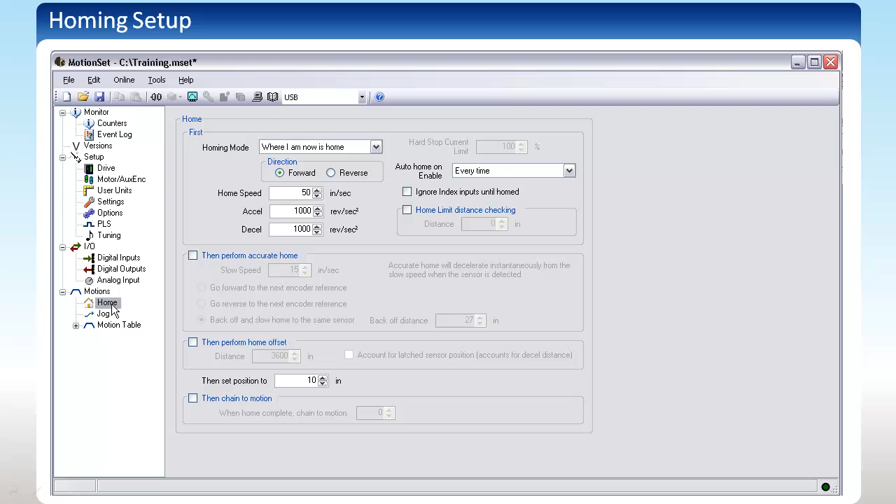Let's start with homing. Your first decision is to select the homing mode that fits your application. Options include homing to a dedicated home sensor, home to an overtravel sensor, home to the marker pulse or encoder reference, or set home as wherever the axis is at the moment.

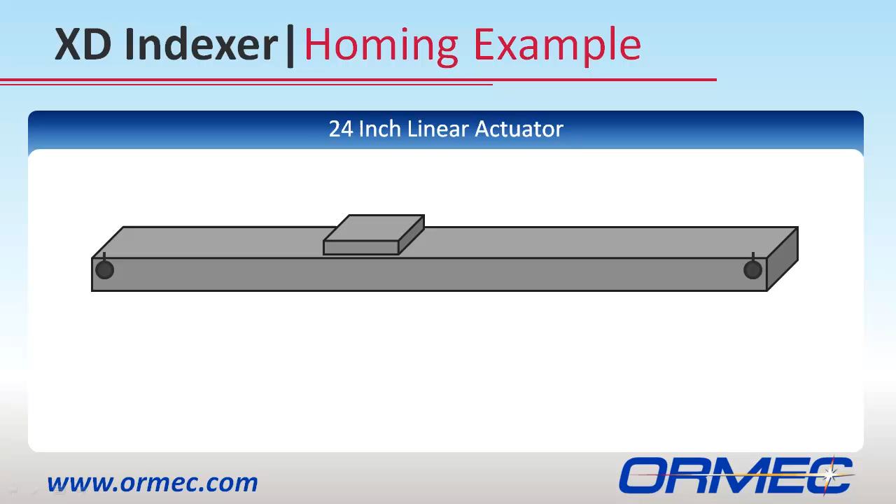To better understand how to program a homing routine, let's make up a hypothetical situation. Let's say that the indexer controls a 24-inch linear actuator that has end-of-travel sensors at both ends of the actuator, but no home switch. For application-specific reasons, after homing, the axis needs to be centered on the actuator, and the center location needs to be reassigned as 0 position so that the axis can be commanded positive 12 inches in the forward direction and negative 12 inches in the reverse direction.

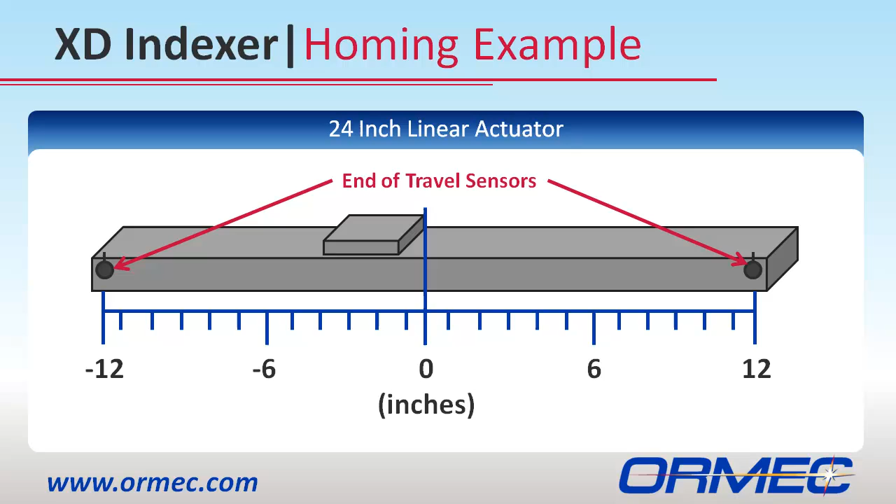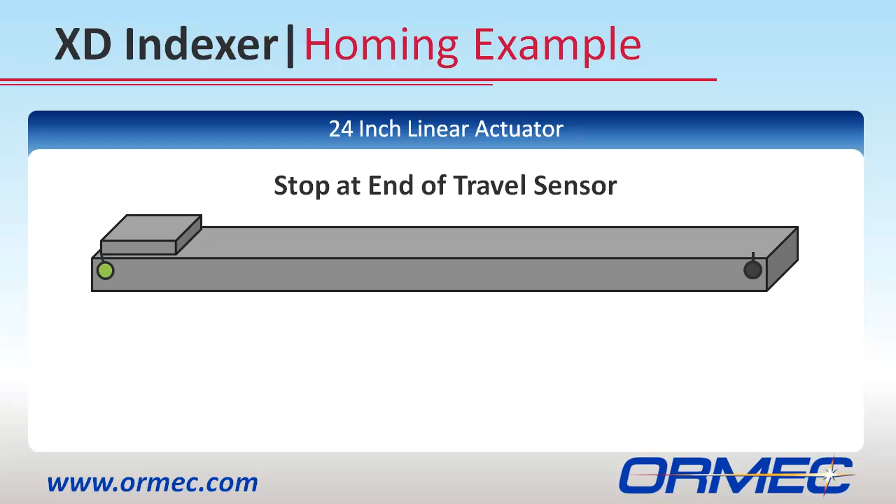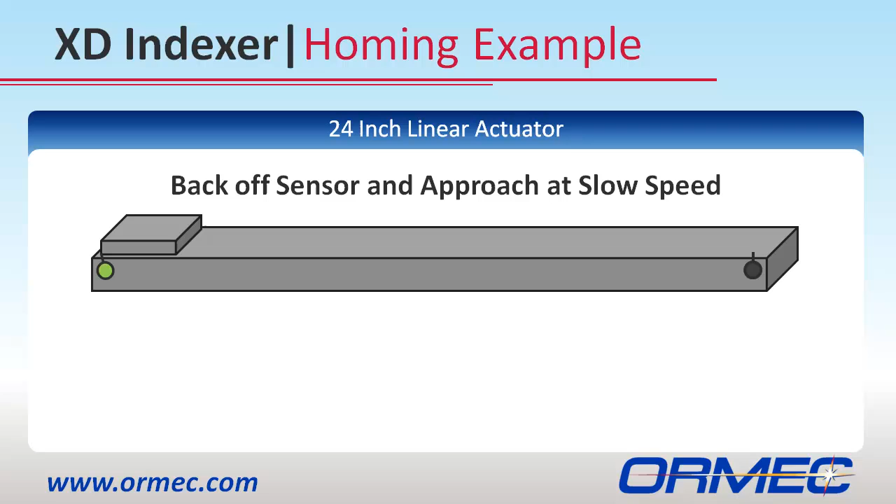The home routine breaks down like this. First, the axis should move in the reverse direction at a controlled speed. When the end-of-travel sensor is reached, the axis comes to a stop. Then, the axis moves in reverse 1 inch to get off the sensor and approaches the end-of-travel sensor again at a very low speed to see the edge of the sensor very accurately. Once the rising edge of the end-of-travel sensor is determined, the axis moves 12 inches forward to the center of travel and sets that position to 0 inches.

Now let's take a look at how to program that. First, select Home to Negative Limit for the homing mode. Select the reverse direction so the axis searches for home in the correct direction. Set the control speed, accel and decel. Enable the next section by checking the box that says, Then perform accurate home. Select a slow speed for the accurate home move and select back off and slow home to the same sensor. Set the back off distance to 1 inch.

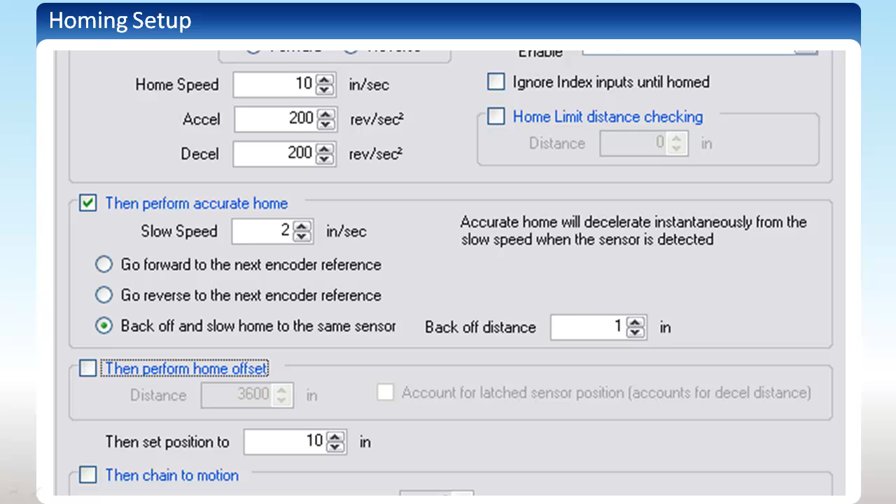So far, we have told the axis to home in the reverse direction to the negative end-of-travel sensor. When reached, it will back off 1 inch and slowly move towards the sensor again. Now we want to enable the next section by checking Then perform home offset and type -12. This means that after the accurate home is complete, the axis will back off 12 inches to get to the start position in the center of the actuator.

This offset also has the added option of accounting for the latched position of the home sensor from the previous step, regardless of whether that was the initial home or accurate home. When an axis homes, it moves at a constant velocity until it sees a home sensor, then decelerates to stop. This stop position is past the rising edge of the sensor and therefore is only so accurate. This checkbox allows you to electronically compensate for this small distance by keeping track of the exact position of the rising edge of the home sensor.

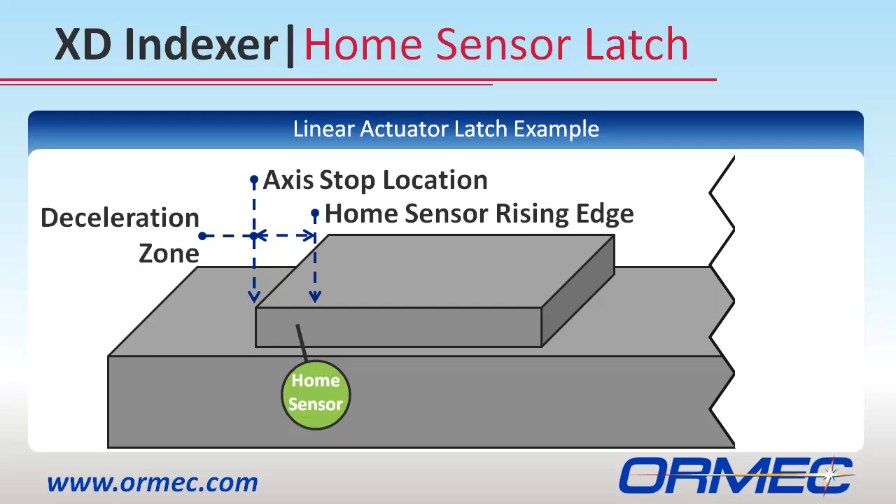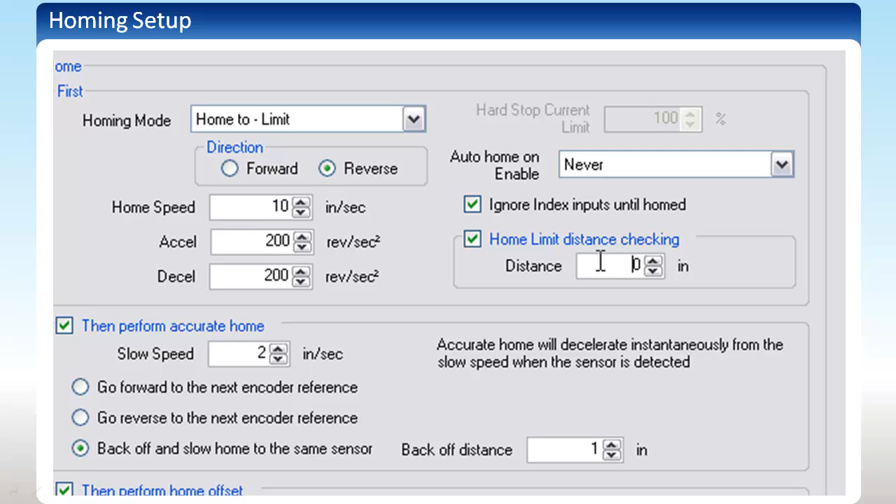After the axis does the offset move to the center of travel, the Then Set Position To allows you to assign a position for this location. In our example, this position is reassigned as 0 inches. There are a few other options here that may come up in your application. Back at the top, you can set the indexer to home automatically when the axis is enabled. You can also set the indexer to ignore index inputs on the drive until the axis is homed. A home limit distance can be specified so that if the axis moves a predetermined distance without finding the home sensor, it faults the axis.

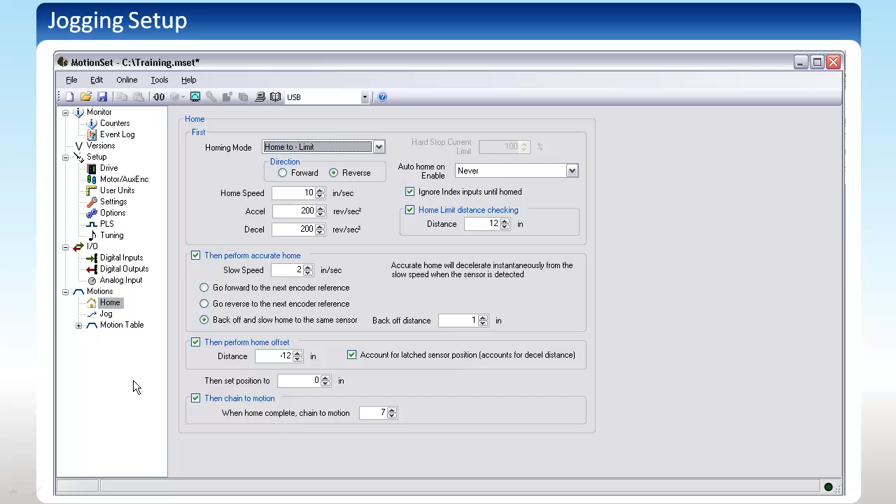Finally, at the bottom of the screen, you can enable a chain to link the end of the home routine to another motion automatically. That means after completing the above home routine, it will jump into the motion table and begin executing motions. Finally, the jog branch allows you to set up a normal and fast jog speed as well as the accel and decel to use when jogging.

If we look back at the input assignment, we can see how to use the normal and fast jog speeds. In this input assignment, input 7 or 8 will jog the axis forward or reverse. I can add jog fast to input 9, which means that when input 9 is on, I can trigger input 7 or 8, and I will jog fast forward or jog fast reverse.

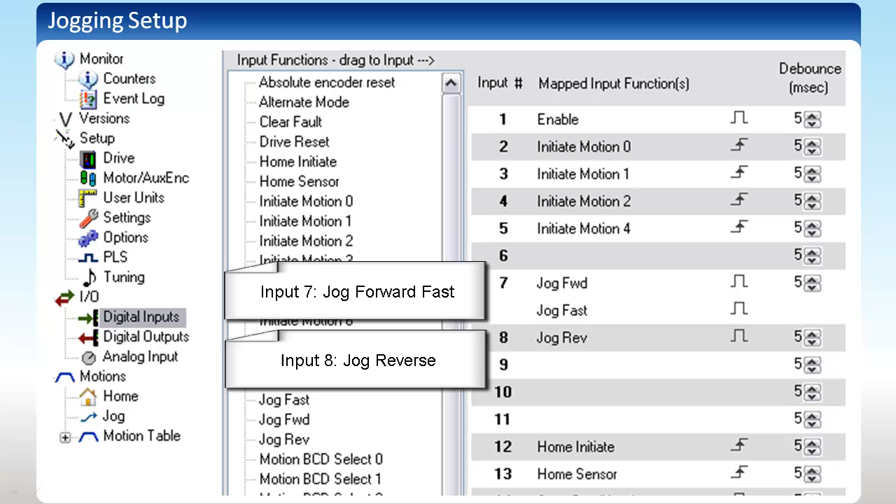If the application dictates only jogging fast in the forward direction, I can save an input by putting both jog forward and jog fast together on input 7. Now when input 7 comes on, the axis will jog fast in the forward direction. When input 8 comes on, the axis will jog at a normal speed in the reverse direction.